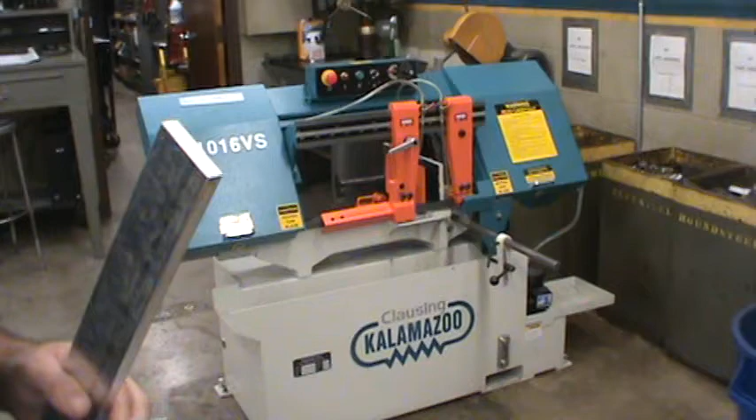Okay, so this demo is for the horizontal bandsaw, and we're going to be checking out on this machine the first day in the lab.

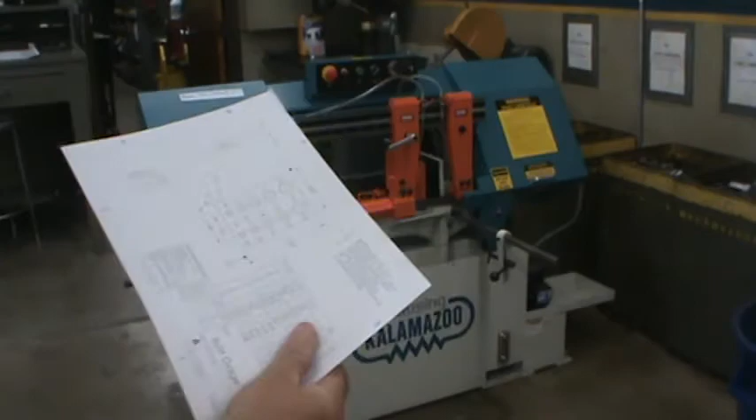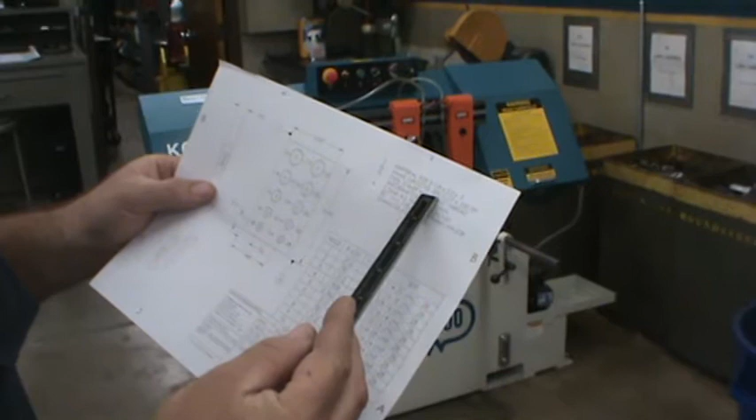So we're always going to start with our drawing, and on our drawing for the bolt gauge, it actually shows in the far right corner here, it has some notes, and it shows the material size. And it shows 3 1/8 of an inch times 2 inches times ½ inch.

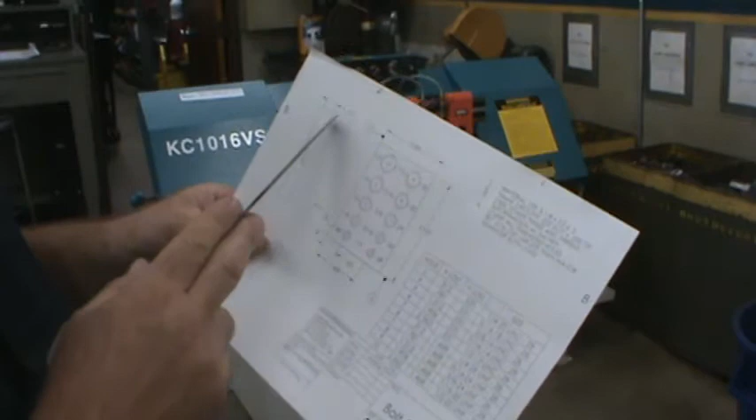And you can see on the finish sizes, our drawings are always going to have a 3-dimensional finish size. And this shows it's going to be 0.375 or 3/8 thick as the finish thickness. The finish width is going to be 2 inches, and the finish height is going to be 2.937. So you can tell by the material size, it's going to be 3 1/8, so it's going to be cut a little bit over this 2.937 dimension.

I'm going to have some material out here leaned on the back side of the saw, and this measures actually exactly 2 inches. I can measure this with my scale, and you would want to do this before you cut it. And it's ½ inch, and then of course it comes in lengths as large as 12 feet. I think we have them cut to 6 feet. That would be the longest.

So on the horizontal saw, the way we would operate this is we can actually pull this slide, this clamp back and forth. I would set the material in there, and then I would bring this up, and it's gravity fed. So if I bring this up now, you can tell that now it's feeding, and I always want to leave the saw in the down position after it's finished the cut, so we don't have any material there we can check.

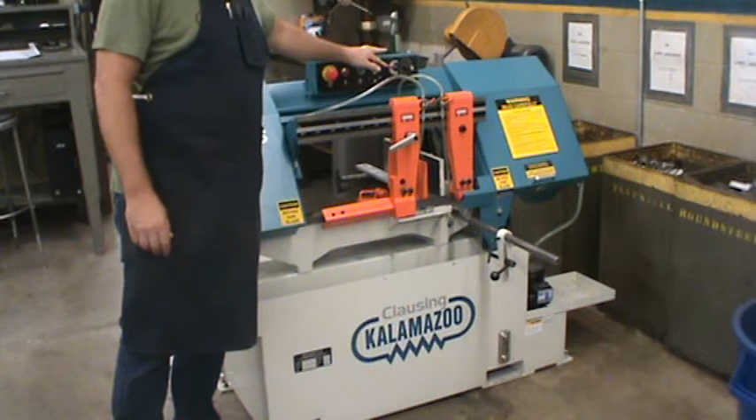And you can also see this on the very far right. It has a dial for the feed rate, and then it has an on-off switch for the feed rate, and the on-off switch is on. So I'm going to switch this off, and then once I bring this up, I'm going to use this handle, not my wheel here, but this handle, which actually tightens the blade. So I think I might eventually install a different handle here so I don't have to use this blade tension handle. And as long as I don't turn it, it's okay.

I'm going to bring this up slightly with the feed stopped. The feed dial I'm not going to change. We're going to leave that between 2 and 3. I think it goes all the way to 10, and that doesn't specify any specific speed. It's just the rate that we allow gravity to feed it. So it doesn't specify a certain speed. It's just relative to faster or slower.

So now that I have my blade up and stopped a little bit, I'm going to have clearance here where I can push my material through the bottom of the blade where the clamp is. I'm going to use my 6-inch scale, and I'm going to measure from this side of the blade to the edge of my material. And I'm going to go 3 1/8. Because it's a fractional size, it has a pretty wide open tolerance.

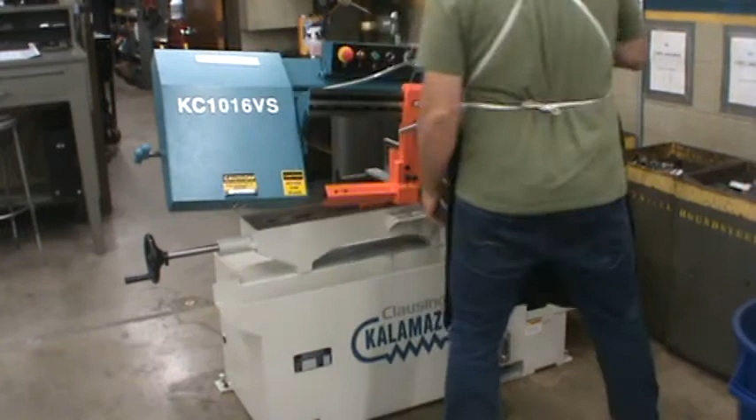I'm going to measure a second time after it's clamped with the edge of my scale against the edge of the blade on this side. And this shows I'm at 3-inch 200. It's a little more material to cut, but I'm just going to cut it at that point.

Now, maybe we would want to do this either before we load the material, or I can do this now. In this case, I'm going to make sure the reset button is turned all the way right. This is the emergency stop, and you can press this if there's any issues. Press this in, it will stop the blade, but I'm pretty sure this won't stop the feed, so that might be an issue. We'll actually look at that right now.

I'm not going to change my feed rate. It's set to 2, just past 2. I'm going to turn the blade on with the green button. Oh, I had the reset set, so I'm going to turn the emergency stop to the right. Now I can receive power. I'm going to make sure the coolant's running on both sides.